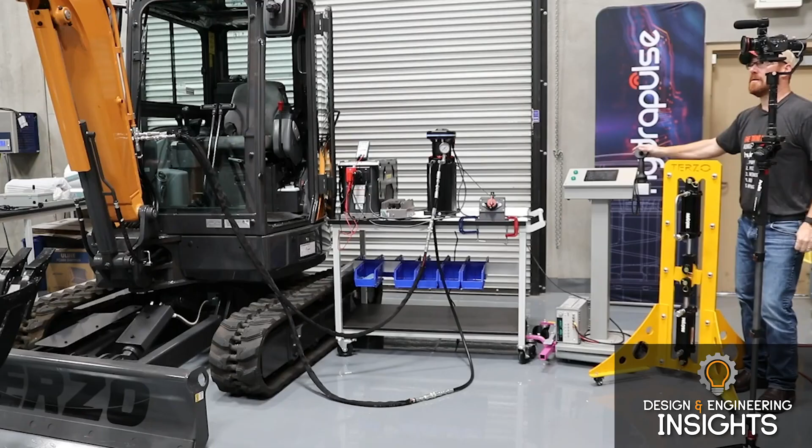But in short, all we do here at Terzo Power Systems is create a product, the Hydrapulse, that enables the electrification of off-highway equipment. So it's a piece of enabling technology, and we allow vehicle OEMs to develop their next generation vehicle platforms with our advanced, compact, and really energy efficient componentry. So that's sort of what we do.

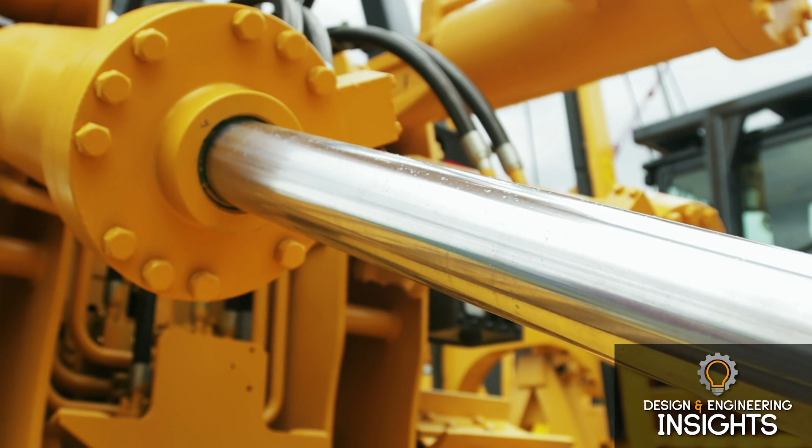Okay, could you maybe go into the Hydrapulse technology a little bit, how it works, and what benefits it would offer? It's actually pretty simple. This is our smallest one, but all we did was integrate the motor control electronics, which we call the inverter, with the motor, and then we just have the pumping work function. And those three pieces fully integrated allow you to perform a lot of different fluid power functions, whether you're directly powering an actuator or a cylinder or powering a standard valve bank.

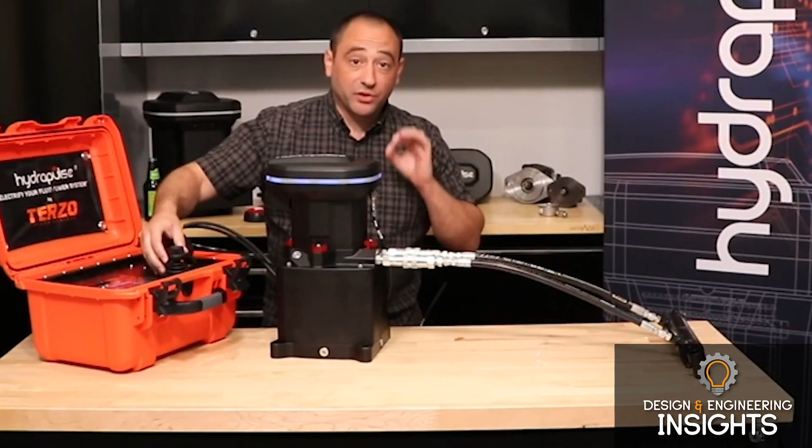Really the key was how do we bring high voltage into a unit and then be able to perform all those functions. So it was a lot of integration, but since it's off-highway and rugged, everything had to be developed for our industry. You can't go out and buy a ruggedized compact inverter out there. So we had to develop all of it from scratch to do what we're trying to do. So it's just integrating a motor, controller, and a pump in its simplest form, but it's all the little details that really take a long time to develop.

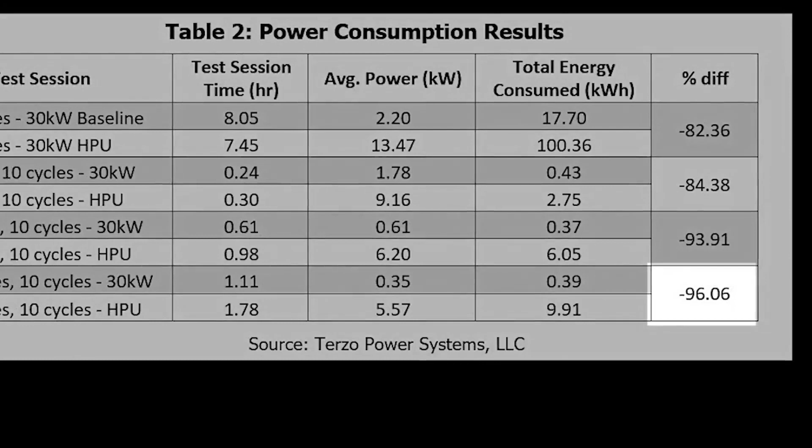Okay. So what are some of the benefits an OEM and then its end use customer can get from electrifying hydraulic systems? Well, it's interesting. I started everything with efficiency as the basis for electrification. 10 years ago, that's what I started looking at, and we do efficiency really well. We just published our results from our 3-year California Energy Commission pilot demonstration, where we achieved over 96% energy efficiency. So we really got the efficiency side done.

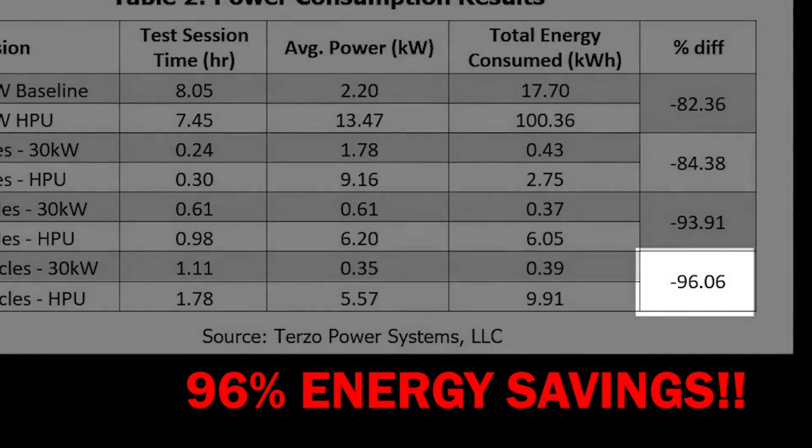But what we also realized was there's so many other benefits from electrification of fluid power. When we significantly improve the efficiency, we can downsize the reservoir. That reduces oil, size, weight, cost. We can also reduce the number of components. Actually, I think we hit 80 or 90% reduction in component count. So that reduces your engineering requirements in designing a system. It improves reliability.

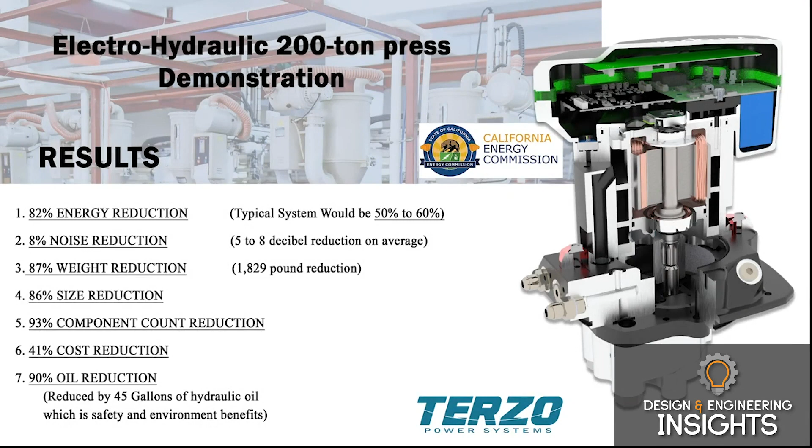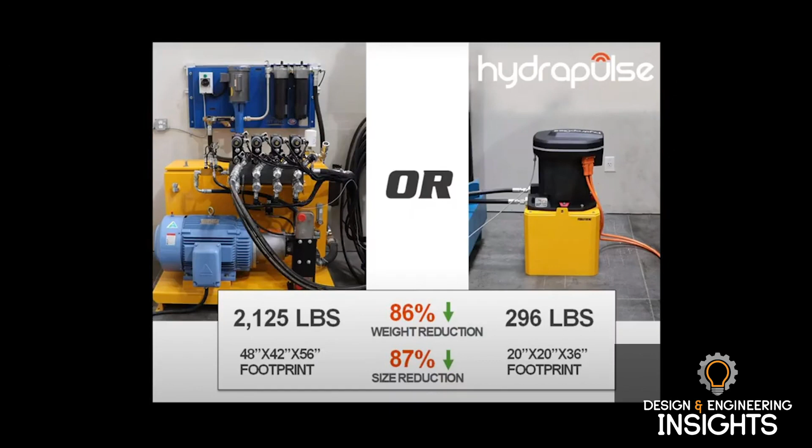If you have smaller amounts of components and connections, that reduces leak points, failure points, so you can improve reliability. And then also your maintenance aspect is completely different with an electrified fluid power system. So there's a lot of benefits to the electrification.

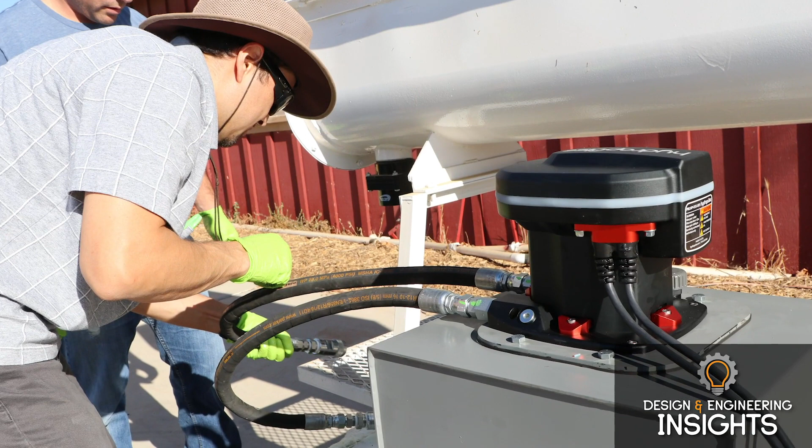And then one of the really exciting things is it really allows us to start envisioning future digital solutions. We're sort of making up new terms here, because it's some new technology, but we can digitally control fluid flow and pressure. That allows you to do a lot of really fun things on the control side.

The other thing that electrifying fluid power can do is it really enables digital solutions that we can't even envision yet. So by digitally controlling the flow and pressure, you enable IoT solutions and things that, honestly, we can't even envision. So that's really the next frontier of electrifying fluid power. That's pretty exciting. So the benefits are numerous, they're real, and what we've done is make it so it's economically feasible to implement this type of technology.

Okay, great. Well, I know you and I have talked previously about the California Mobility Center. Can you maybe go a little bit into that project and how Terzo Power Systems is involved with that? Yeah, that's an interesting story. So I got involved before it was called the California Mobility Center. It was really just an idea. So I went over to Germany with a delegation from Sacramento here.

There were policymakers, regulators, local advocates for mobility, and because Sacramento is sort of a hub globally for a lot of the electrification and mobility pushes, we went over to Germany to learn why this group called PEM Motion in Aachen, Germany, was so successful in spinning out numerous startups in mobility. And they've done that very successfully, creating billions in investment and growth in the region. And we wanted to look at how can we bring that over here and replicate that to some extent in the greater Sacramento area, because California is a great area for that.

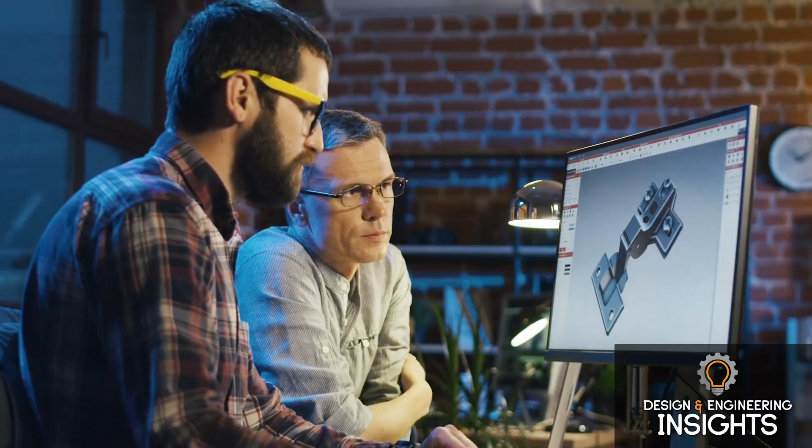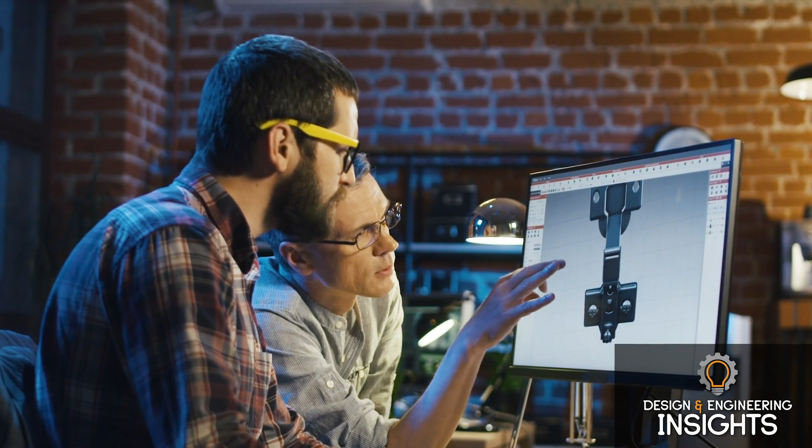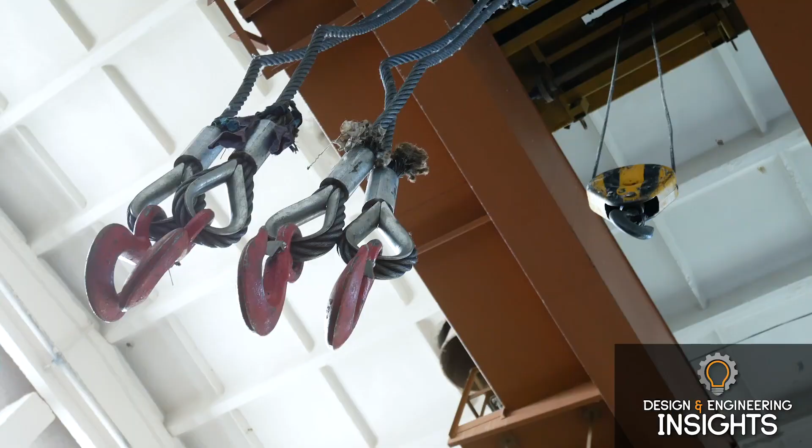The difference that I knew in the US, there are a lot of accelerators, ecosystems, investors all around software startups. But for hardware, it's completely different. Software, you basically need an internet connection and a really good source of coffee to create the next Google. But hardware, hard tech, you need millions of dollars in lab equipment, prototyping resources. 3D printers don't cut it in so many applications for hardware. Engineering resources, shop space, heavy lifting equipment. And every iteration can literally blow up and send tens of thousands of dollars up in smoke.

During our R&D phase, we actually called Fridays Blow Up Fridays, because that was the day when we planned our most high risk experiments, and they blew up a lot. So they were sort of Blow Up Fridays. That's something that investors don't typically want to invest in. Right. That's why they say hardware is hard.

So the California Mobility Center is being established to be a hub of excellence for creating the technology for smart mobility. We've taken sort of what was done over in Aachen and tweaked it for the American context; our academic institutions are different, public-private is different. So really it enables industry innovators, educational institutions, and clean tech regulators to come together and create that ecosystem to help companies like myself to really get to commercialization and scale up.

So it's a platform for addressing a lot of the technological challenges, and then really importantly, aligning the policymakers with the technology that's coming up. Because it's not very successful if policymakers just create regulations in a vacuum without understanding the technology. And the same on the technology front, we don't want to create solutions that don't meet the regulation. So we have to have that ecosystem that works together. So it is truly a public-private collaboration.

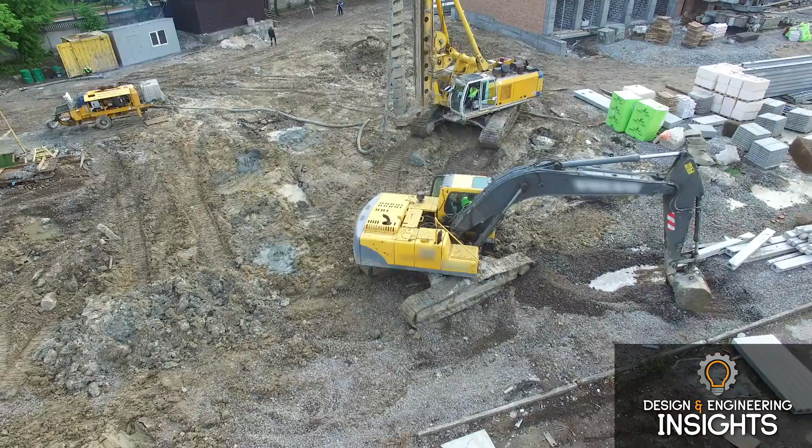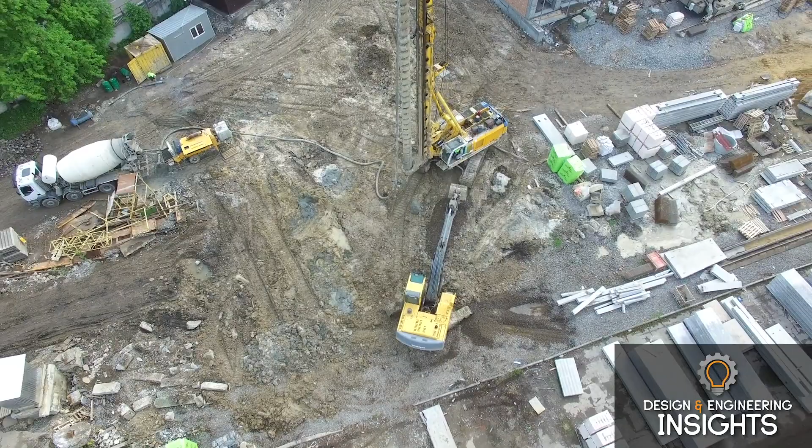Our industry is really slow to adopt since durability and reliability always trump new technology in off-highway equipment. The OEMs need to create vehicles that make financial sense. They need to make their owners money. They need to work day in and day out. And that's a totally different situation than a lot of passenger cars. We don't have people buying an electrified dozer for reasons other than making money. That's why they buy it. That's different than a Tesla or other on-highway stuff.

The current power densities of batteries make it a challenge as well. So we really have to look at new business models that make sense. But that is changing quickly, and I really think that if OEMs don't adapt, we are going to see some of the largest and most historic OEMs in our industry going the way of the dinosaurs.

So we hope to significantly speed up the adoption for the OEMs and allow them to compete in this new, electrified landscape, this new mobility ecosystem, which is here, it's coming. There's no stopping it. I think most people are in general agreement. Doesn't matter what side of the political spectrum you're on. It is happening right now.

So we either need to look at how we get on board and really innovate and adopt, and find solutions for the end user, the OEMs, the regulators and the industry as a whole, or we're going to be left by the wayside. We can't change what heavy equipment does. We still have to move earth, build bridges, pour concrete, but we certainly can change how we do that on the vehicle platform. So that's why I think it's exciting, and a lot's going on.